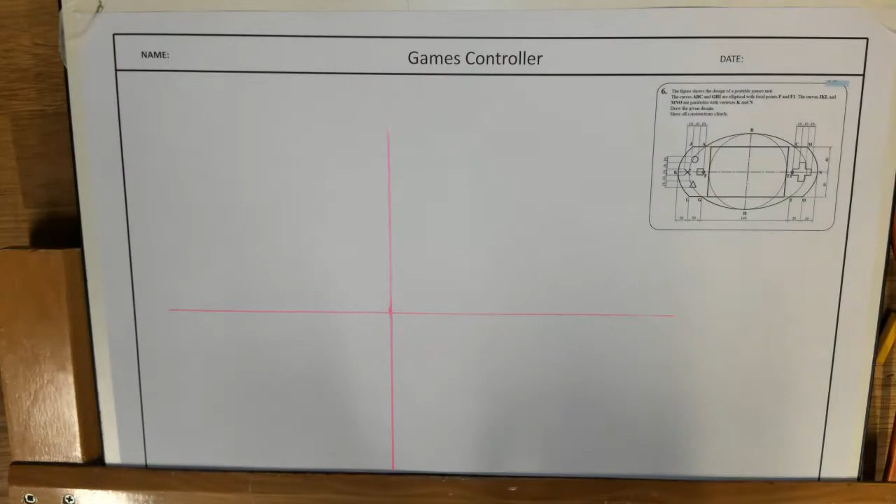So this is a games controller question. It's from a mock. It's a good bit to do with ellipses and parabolas. And we're just going to give you a few measurements to go along with it just to make it a little bit simpler to get started, and particularly when we're starting off here today.

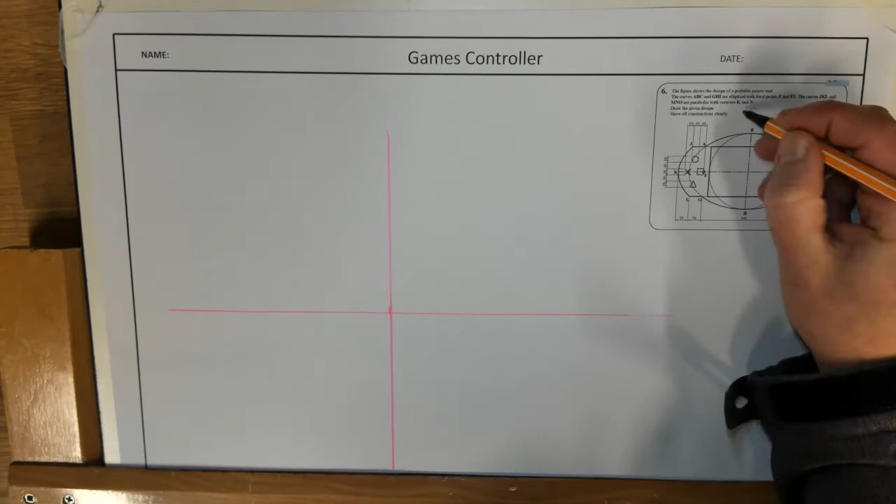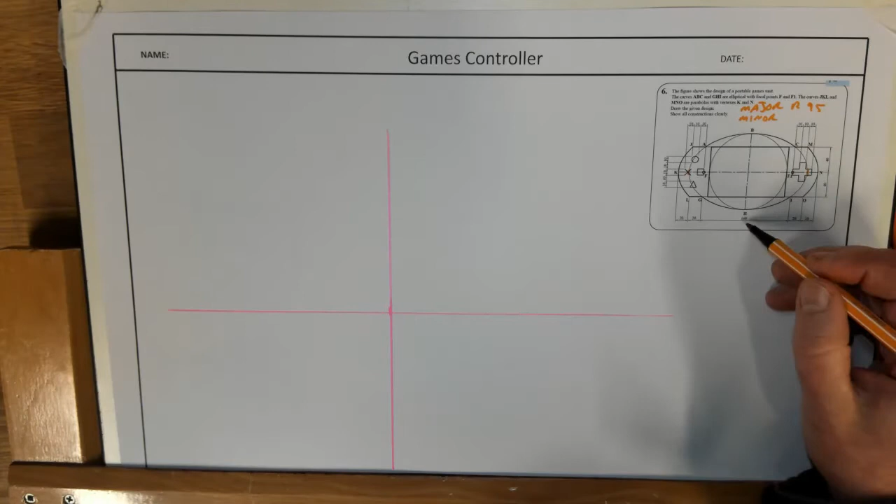So the first thing that we want to give here is the major axis and the minor axis. So we're going to say that this distance here is radius 95. Let me just say 140. Yes, radius 95. Okay, so we put major and we write R95. And then our minor axis we're going to say is slightly less than the 140. So we'll say radius 60. Okay, so there may be a different way of constructing these, but for today, that's going to be perfectly acceptable.

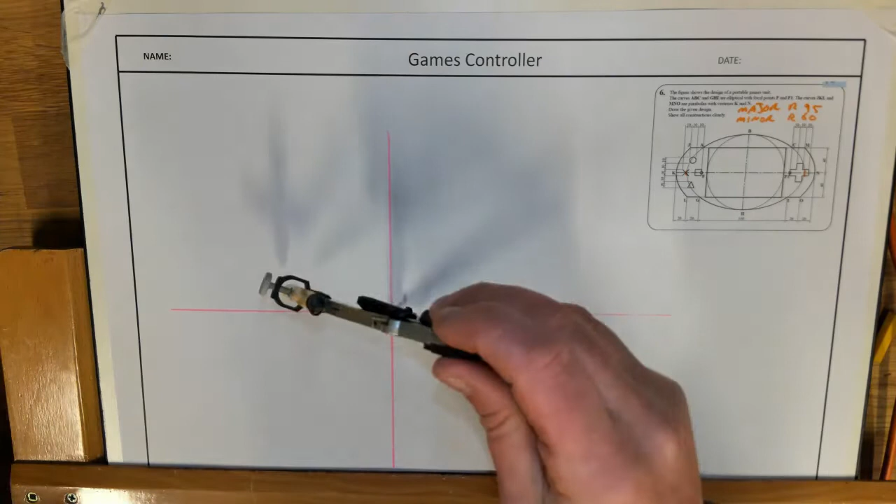Okay, so we're going to set our compass here to 60 first. Okay, so what I did was I came down 130 there roughly, and I came in 140, but I think there will be plenty of space, but just in case anyone was wondering where I started. So there's my minor axis, my radius 60. So I'm going to draw my ellipse first. Okay, so my second one that I need to do is radius 95. Okay, so I'm going to draw that.

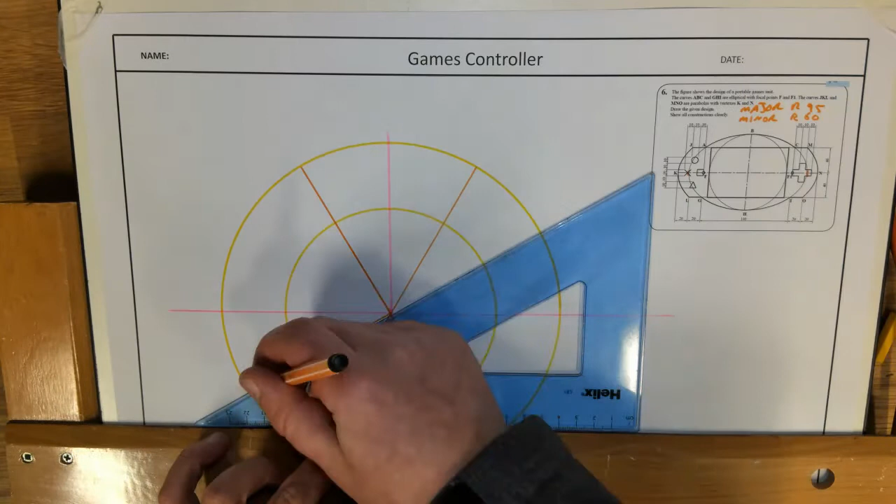And then at this stage, because this is the first full ellipse we've done this year, what we're going to do is draw our pizza slices, as we call them, our 60 and 30 degree lines. And we'll find their various points. Okay. So we'll keep twisting around our set square. And that'll give us our orange lines. So there's basically our main splits done. So you'll see we've 12 splits there.

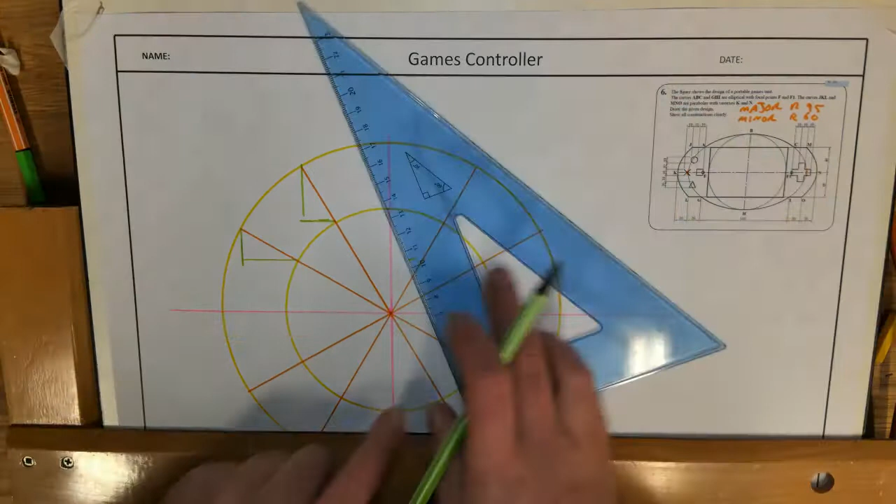And from where the orange line hits the top circle or the bigger circle, we're going to bring it down. We're going to do a construction like that. And I suppose these are different to the ones we did before, in that the ellipse is on its edge, as if you had an egg left lying on a table. So I suppose the first thing that I should have done, although maybe not in black because it's not going to be heavy the whole way. Let me see if I have a light blue handy.

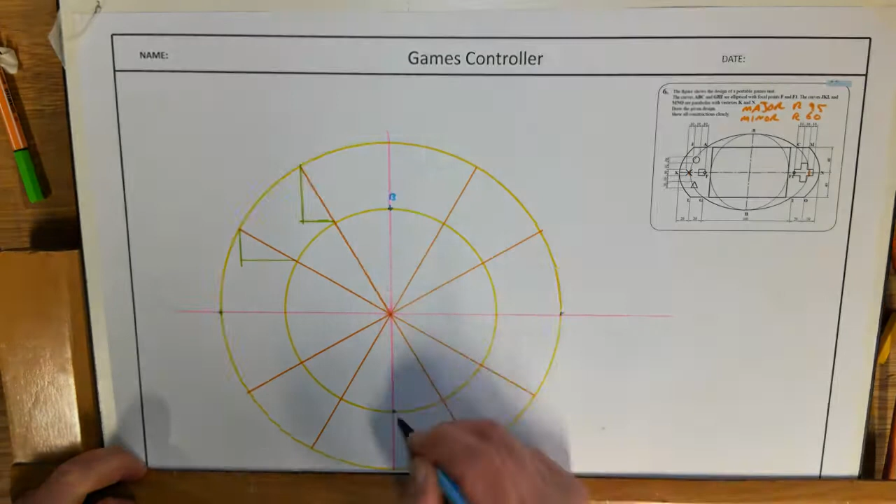So I'll just mark where I want to finish. So they're basically the points that I know. What did they call them? That was G. And that was H. I don't know if they give these two ones. But once I know where I'm finishing, then I know which side of this to use. If I did the other side, say for example here, I should know that that couldn't be correct. So what I can do now is lightly sketch those in. So I'm not going to heavy them yet. I'm using a lighter blue because some of it won't be seen.

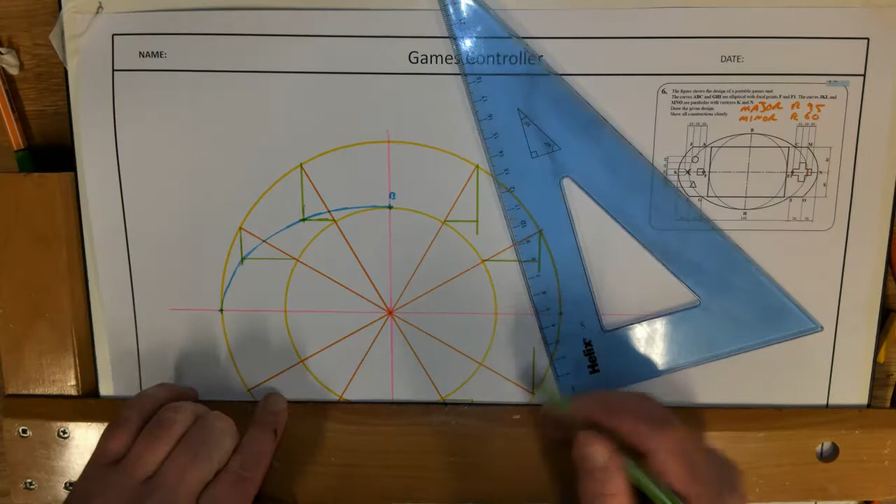Okay, so we'll repeat this for all sides. Now you could also mirror these across and down using axial symmetry, but really this is as quick a method. So that's what I would do. So just on the bottom ones, just to be careful, instead of going down from where the orange lines hit the big circle, they're now coming up. Okay. So we have our 12 points. So again, just be careful with where H is and where these points are, that you don't get confused. Okay, so we'll sketch it.

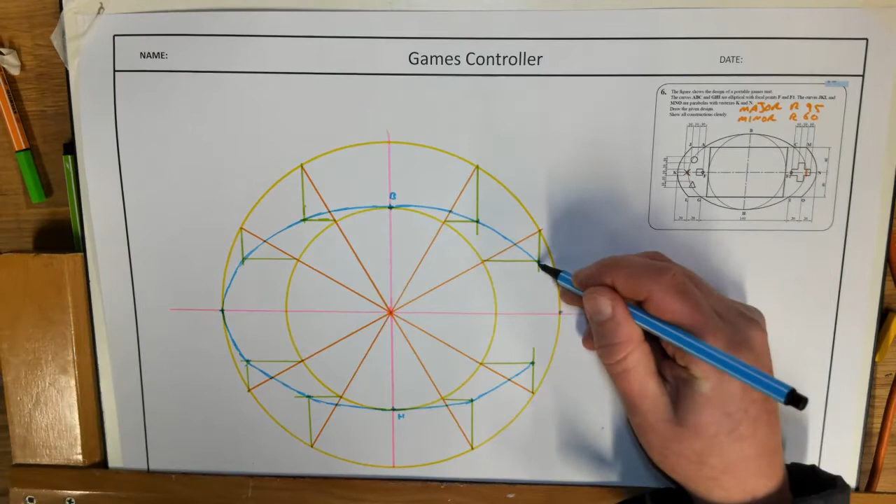So if this is the question that you're attempting in the exam, it's usually question 6. And the most important thing is that you know how to do an ellipse and know how to do a parabola. So I'm not going to look at the screen yet. I'm not going to look at the buttons or the D-pad, as they call this, or basically the crosshairs. If we read the question, we see that these shapes are parabolas. And we know that they're 40 mil above and 40 mil below. And we know that they start out half of 140, which is 70, plus 20. So they start out 90 millimeters.

So let's see, have I another different color I could use? I could use a purple, but it might be a bit dark. Maybe a red. Okay, so we're going to come out 90. We'll just bring it slightly inside of this curve. And we know that we come down 40.

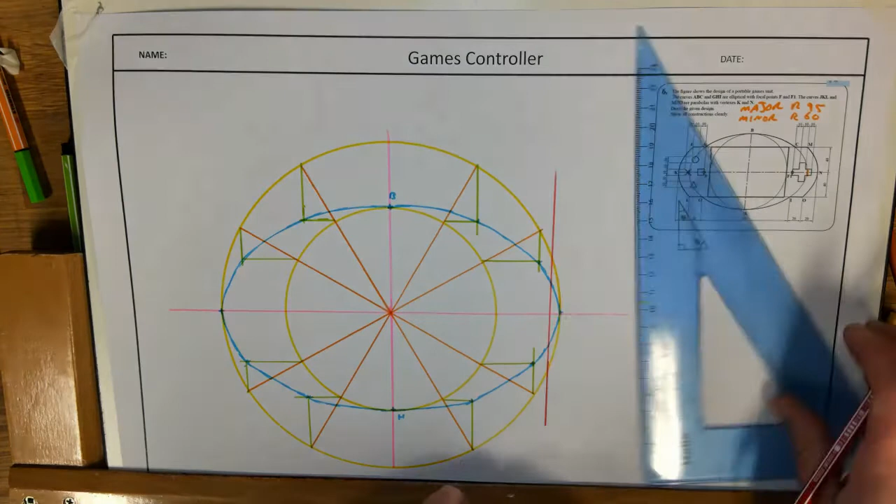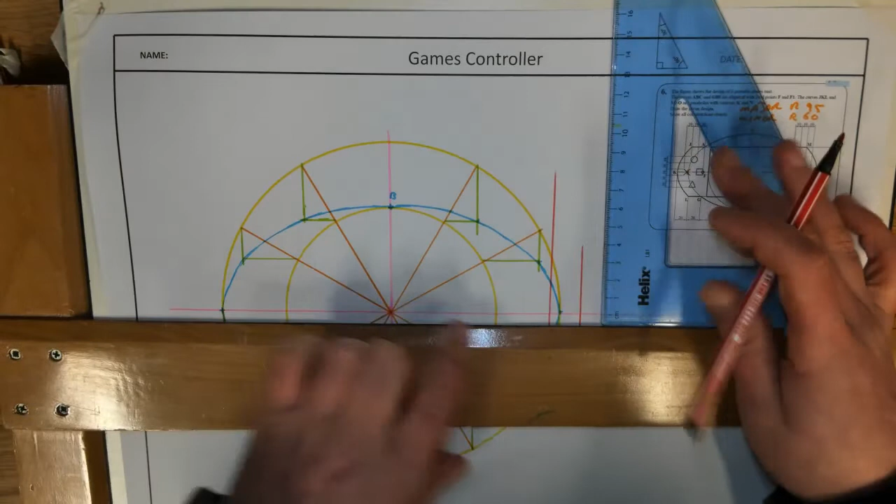Okay. You can draw this, and it comes out 20. It's actually quite short. Quite shallow, perhaps. Double checking that I've done that right. Okay. So basically it's this rectangle. I probably could have drawn it a little bit neater for the video. My set square, some of the measurements are a little bit worn off it.

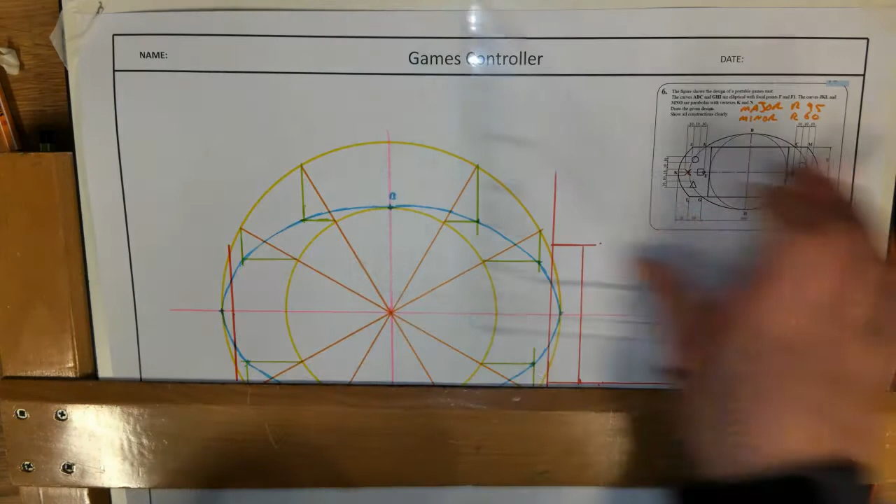So what I'll do is I'll redo it again here, a little bit more accurate, so that you can just see the rectangle rather than the other lines confusing you. So we'll measure 20. And it's 40 and 40, it's 80. Okay, so there's basically the rectangle for the parabola this time. So again, what you'll do is you'll mark the vertex, which is K in this case. This is the turning point.

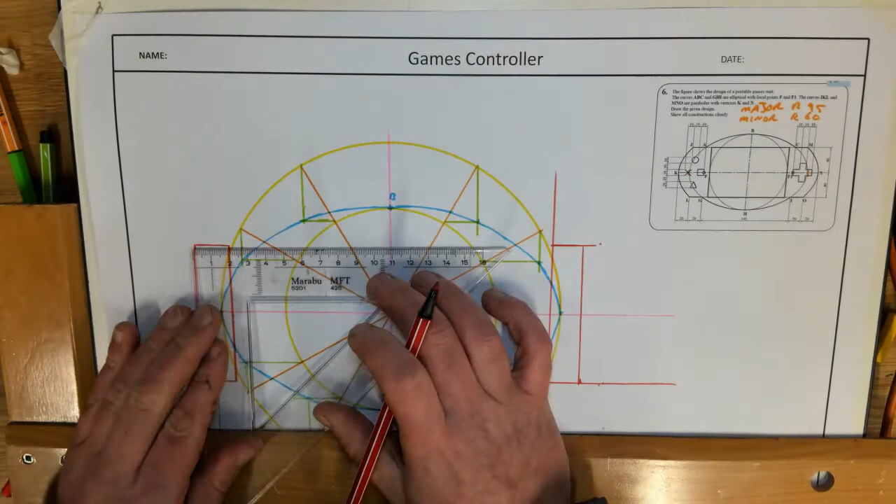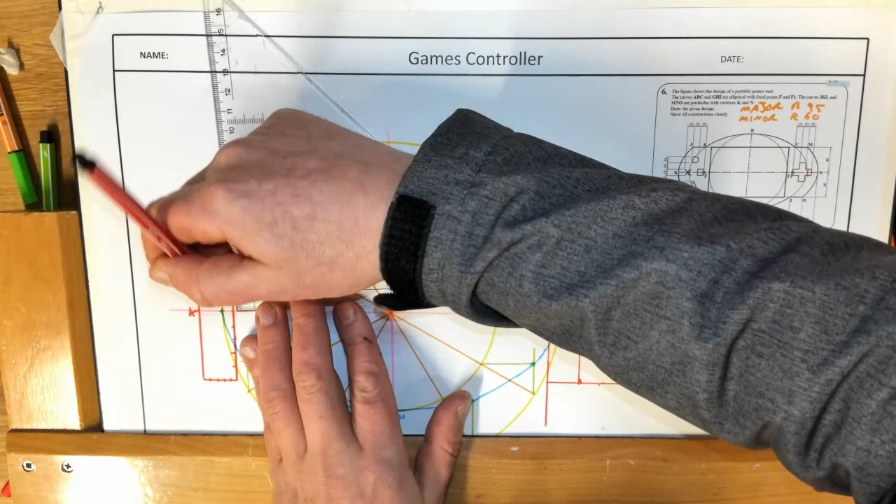And you'll split this. So 20 divided by 5. So hopefully my marker isn't too thick. 4, 8, 12, and 16. And the same here, 4, 8, 12, and 16. And this here is 40 divided by 5. So it's 8, 16, 24, 32. 8, 16, 24, and 32.

Now I might use a slightly thinner pen to mark these, just because the marker on this will cause problems. So I'll try to zoom this in a little bit. Not too far. Okay, so hopefully that will make it a little bit easier for the video. And I'll use my thinner pen. Okay, so hopefully that seems to be okay. Anyways, at this stage you should know the gist of how to do a parabola. Hopefully that shows up okay on the video.

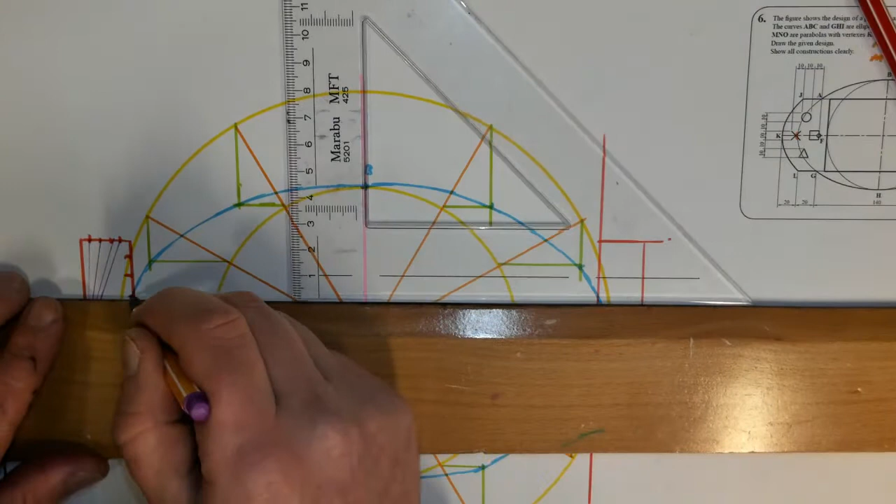And these ones will come straight across. So as usual, I should have numbered them. So 1, 2, 3, and 4. I'm a little bit inaccurate just because I'm using a pen. But basically there's 1, 2 and 2 across, 3 and 3 across, and 4 and 4 across. And we'll sketch that in heavy because that's going to be heavy at this stage. So I'll use a purple.

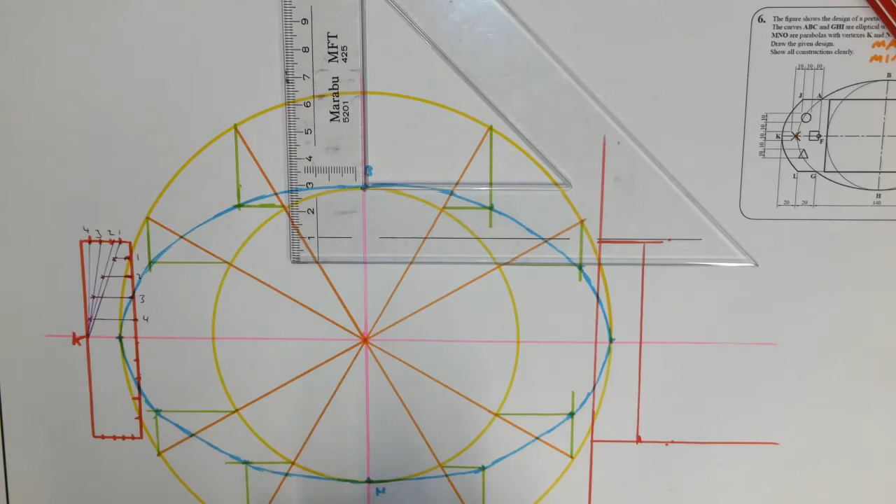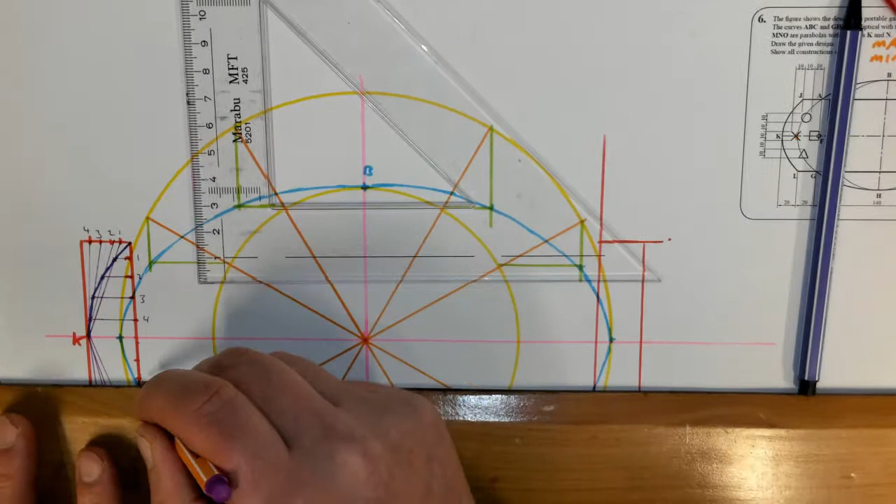Okay, so then what we do is we just repeat it. Now again, we could mirror it if we wanted to, but this is as quick, especially on something that's so small. So that's a little bit more even than the other side was. Bring it across and we'll put a dot on our various points. 1, 2, 3, and 4. And we'll sketch in our curve. Okay, and then it shows us that that comes across to meet the ellipse. So there's a small little gap there.

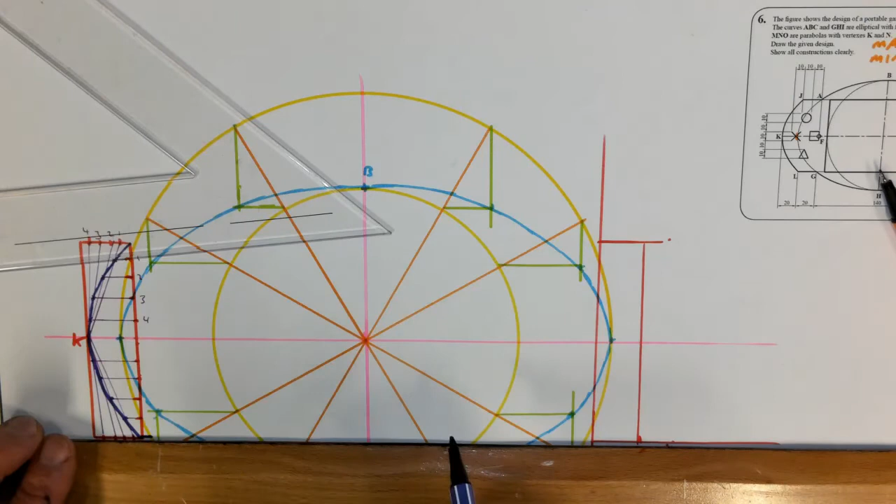Okay. I hope I came out the right size there. I think I did. Yeah. Oh, sorry. I was wondering. I was only bringing it as far as the circle. That's why I was getting confused. It needs to come as far as the blue ellipse. Okay. So we'll repeat the same thing on the other side.

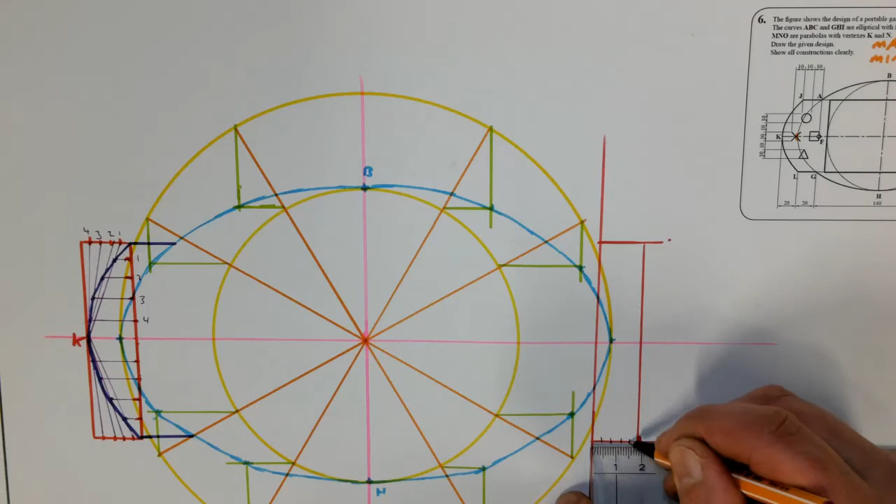So this should be 20. So we have 5, 10, 15, and 20. I'm going a little bit inaccurate there. I don't know what I did. Okay, but the method is fine. Again, the thickness of the markers and depending on which side of a set square can make quite a big difference when you have such thick markers.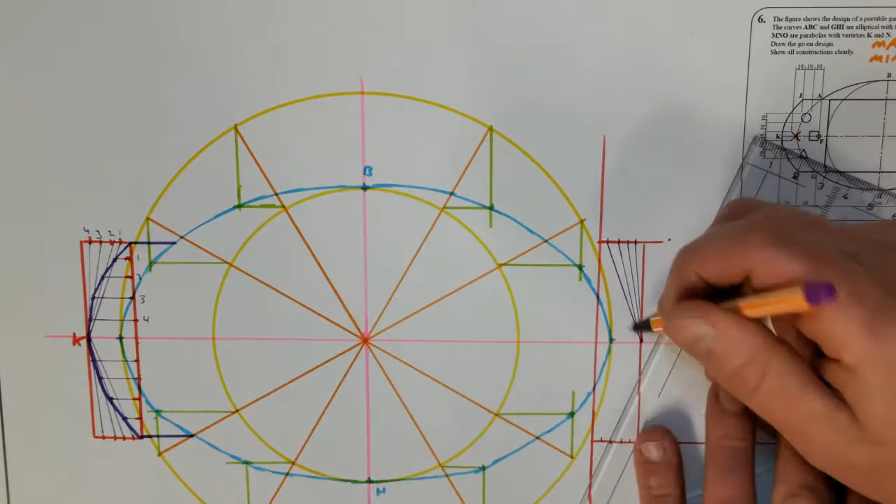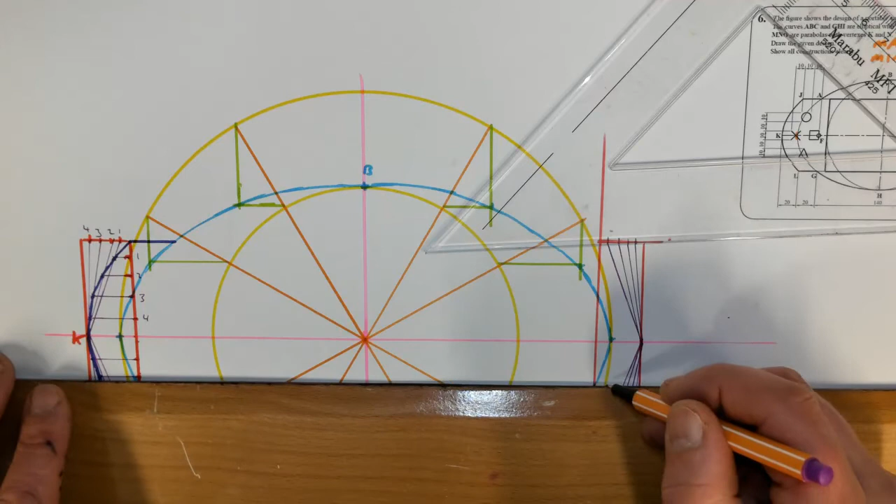And we bring this across to meet it. So you can bring these lines straight across without necessarily measuring the splits again, because they have to be the same on this side. But whatever's handy, whatever makes life easy for you. Okay, if it's handy for you not to get confused and to use the ones you had originally. The most important thing is that you do your best not to make a mistake.

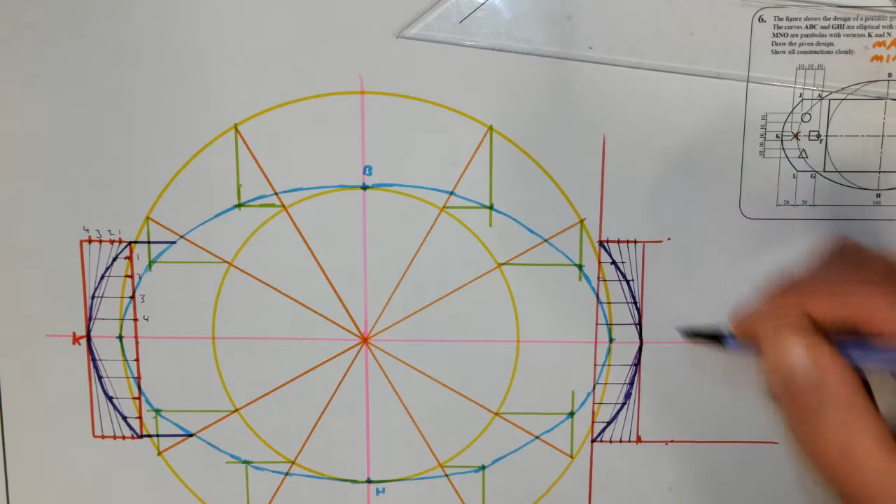Okay, so then we take the purple pen. There's this point, this point, this point, this point, this point, this point, this point, and this point. So again, carefully mark out your points. Number them if it makes things easier for you. This will go across to meet this. This will go across to meet this. And now I'll just take my purple and go over the outline that I would see that would be heavy.

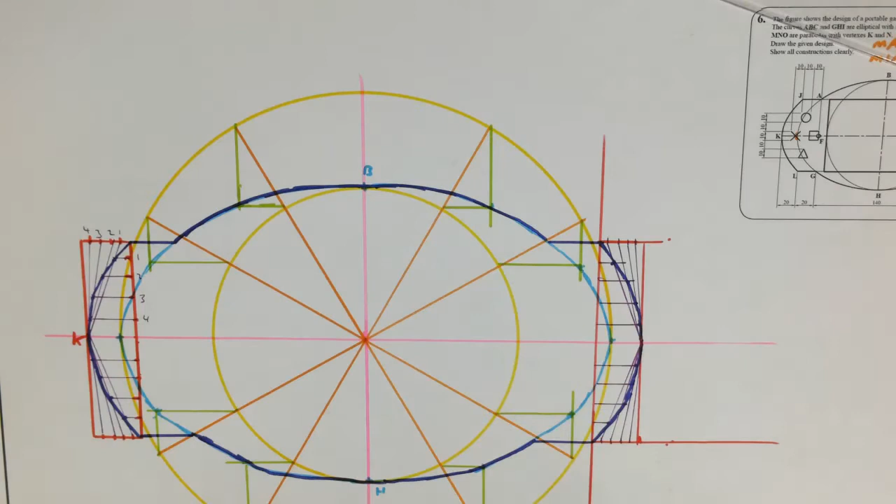Okay, so I have the games controller there, and they're the most important bits, that I get the ellipse shown and I get shown that I can do a parabola. So drawing in the screen now is probably the next easiest thing. So we know that it's going to be 140 wide, so we know that it's 70 from either side of the line. So if I draw a line across between the two of these and measure 70 on the left and 70 on the right. Oh no, sorry, it's not 70. I was wondering because it would be touching the edge.

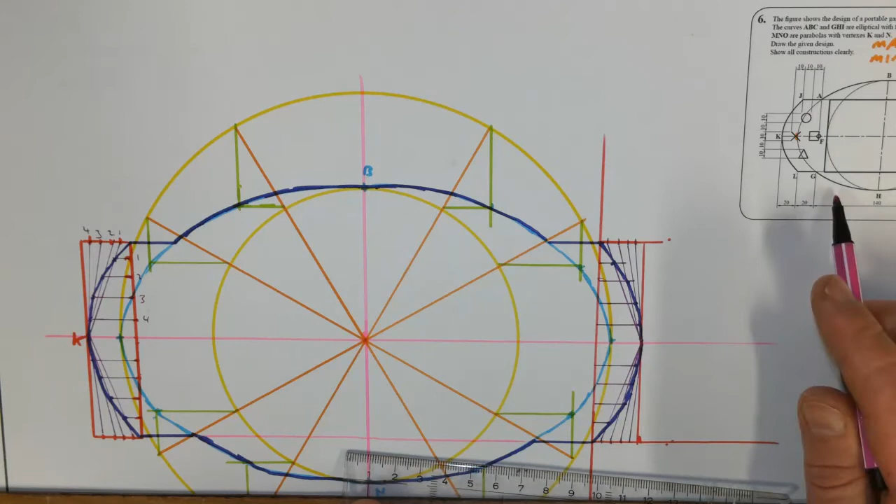It's the same width as this smaller circle. Sorry, I was trying to see what it is. So I was wondering because 70 wouldn't, there's no gap between it. So bring this across to meet it. Okay, so what that actually is, it's level with the circle. Okay, so again we'll heavy that in our purple.

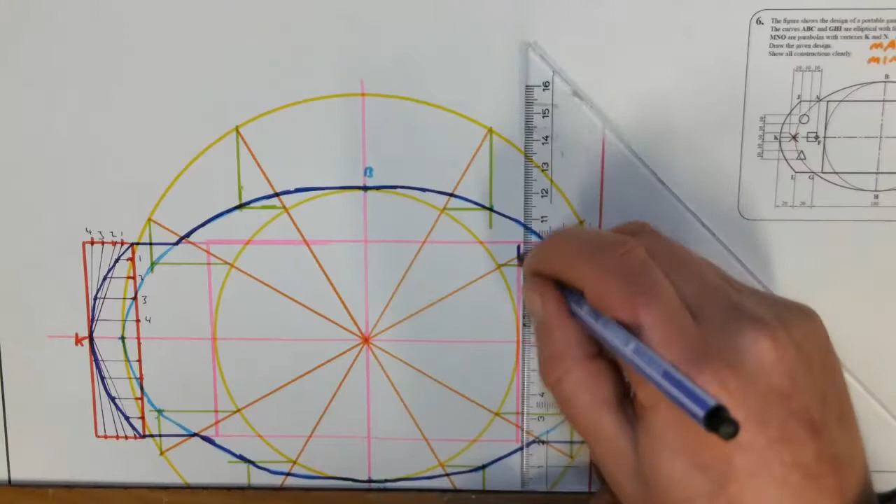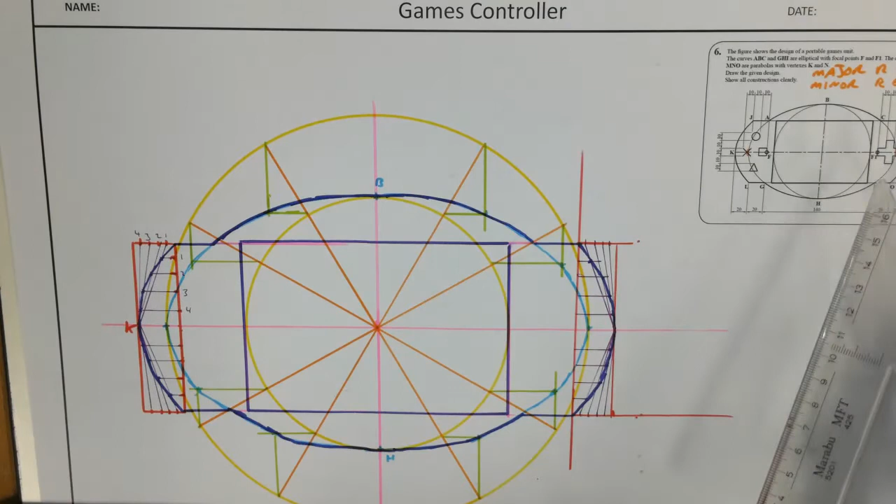Okay, and again if you're not sure, like it took me a second to see that, and you get stuck on the day of the exam, the most important thing there is that you put in a screen. Okay, we'll zoom that out a small bit. Okay, so what you can start to do then is you can start to put in the circles and the crosshairs here. So we'll start at that. So we know this is basically 10, 10 and 10 wide, and we can assume it's a symmetrical shape.

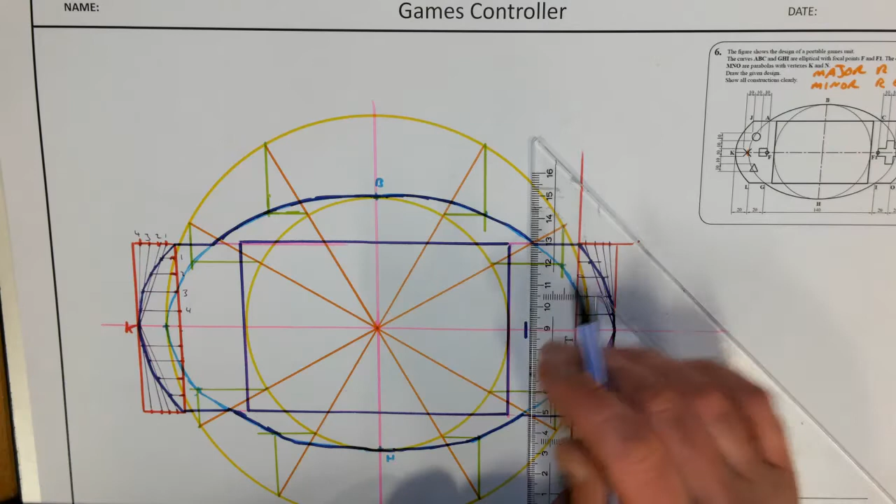So have they given us a distance for F? It seems that it lines up with this point here where this meets. Okay, so if we're accurate, that's going to be my starting point. Okay, so I'll bring this up 5 and I'll bring it down 5. And then I'll start to draw it out. So basically it's going to go 10 across.

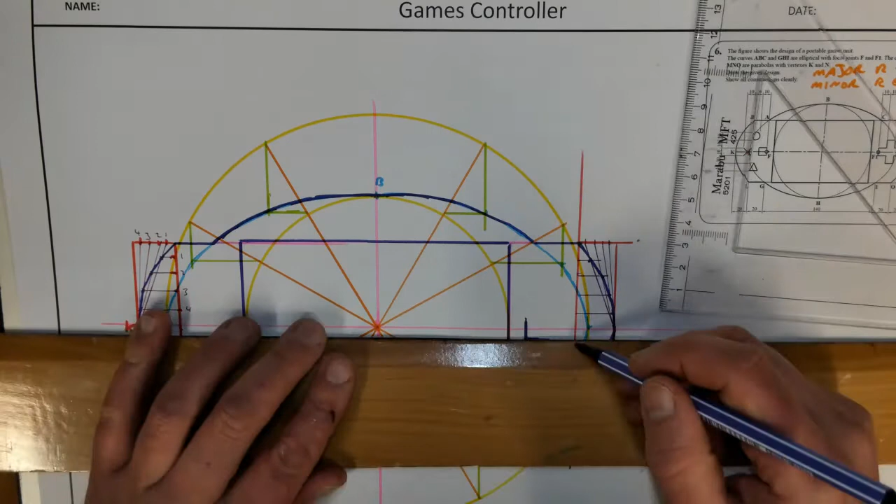And I should be drawing this lightly really. 10 down, 10 across, 10 back up, 10 across further, and then up, and then the same on the top side. Okay, so it could be a little bit neater, but that's the main thing.

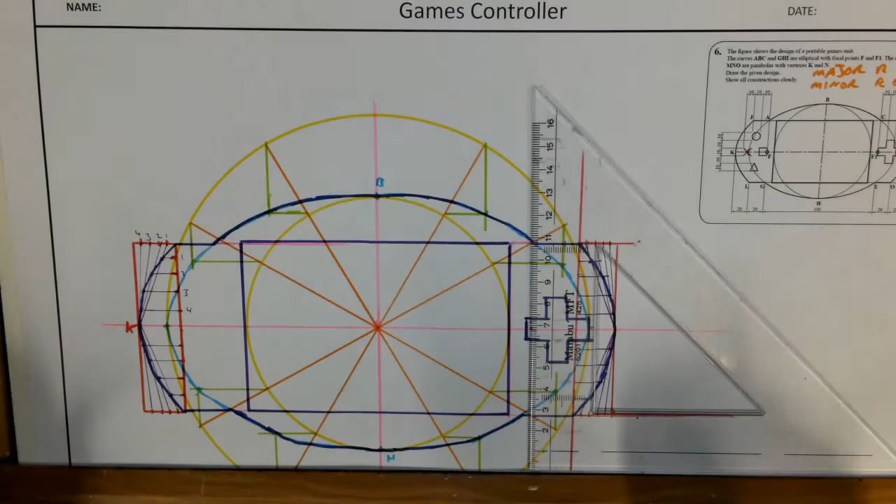So what that lined up with was that. Let's see if I draw a little tick mark here. That lined up with that, or I lined it up with that. Okay. And then the same on the other side. We'll assume that the square button that they start with is here. So again, it's 5 mil below and 5 mil above, because we know the height of it is 10 in total. Okay, but again, if that causes a little bit of confusion, I wouldn't be too hard on yourself.

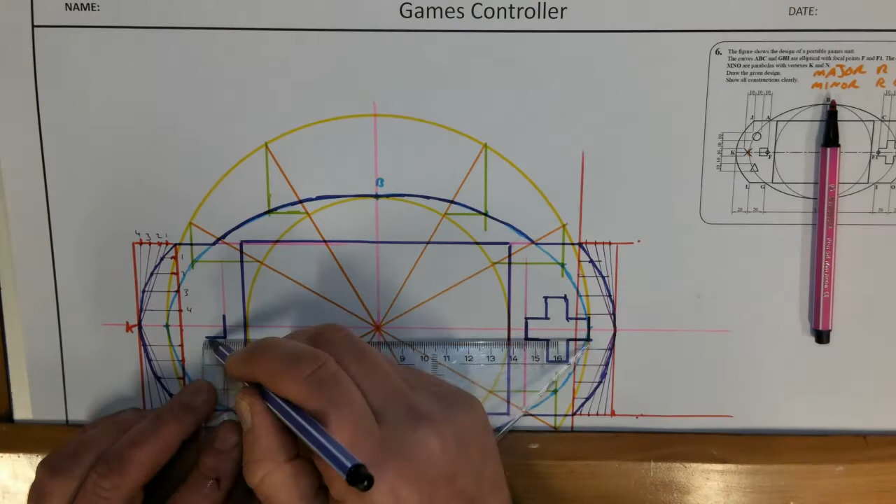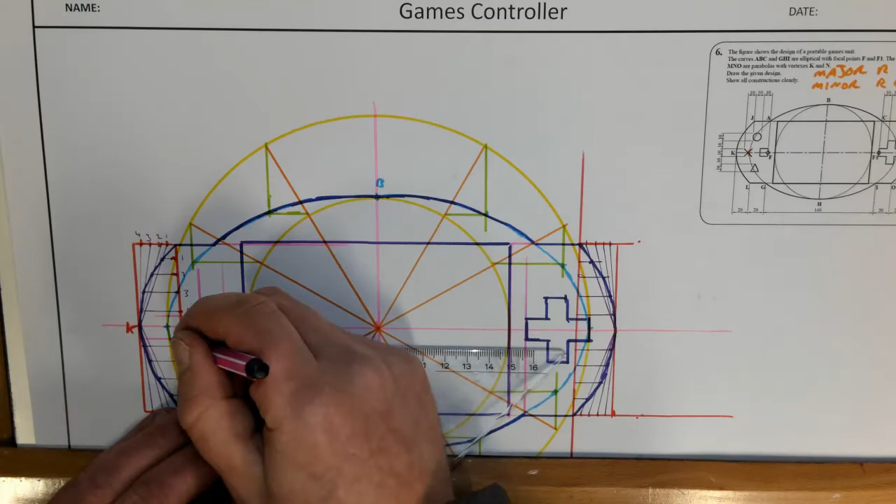Okay. And what we'll do now is we have to come down, or well, we can extend that out, I suppose. And we can extend this down. And we'll measure another 10, which happens to be on that red line. And another 10. Now again, yours may look slightly different to mine. It just depends on the thickness of my markers. I may be a little bit off in some areas. Basically, I'm keeping a 10 mil gap between each shape for the button.

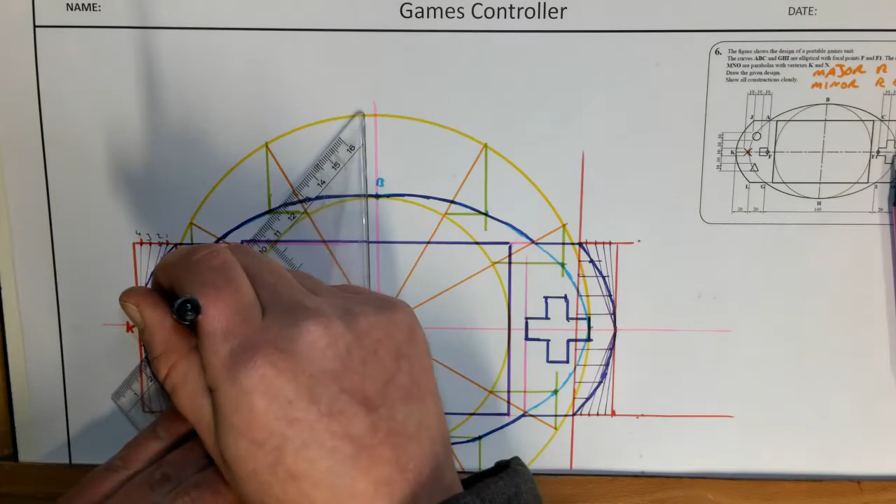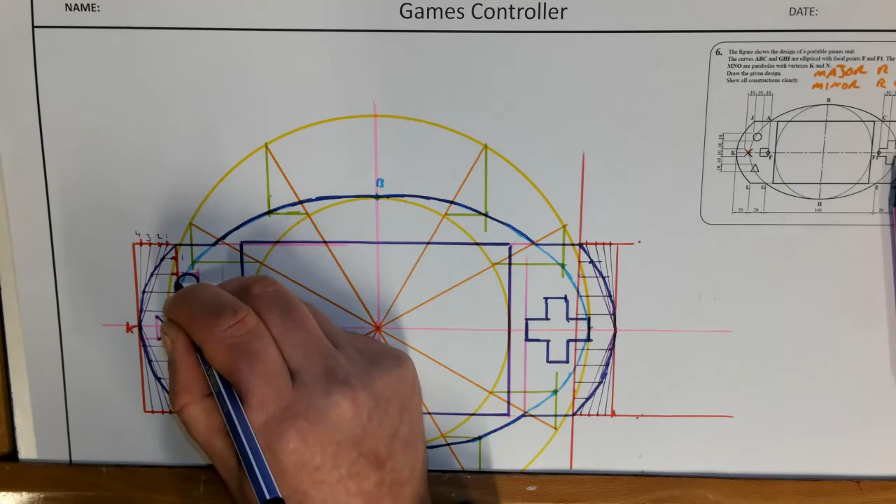So I have a rectangle here, or a square, for drawing my X in. So I'll draw in both corners. I have my square done. This triangle here, if it's 10, there must be 5 to the middle. So I'll draw this triangle. And then the last thing is to do the circle. Now, unless you have a circle template, you're going to really struggle to get that circle in. So all I'm going to do is just sketch it. Okay, it's better to sketch on the day of the exam than not put something in.

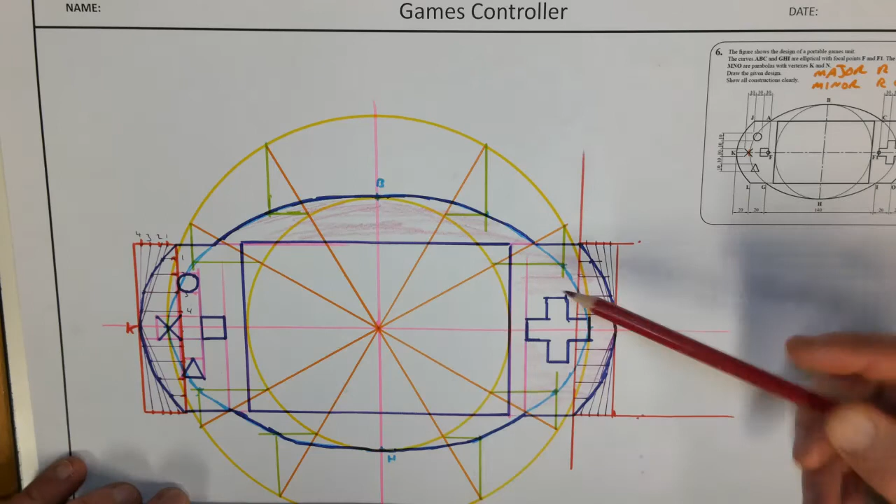Okay, but that's the question done, completed. I have the screen, I have the crosshairs, I have the various buttons put in. Even if we just got the screen on the outside curves, that will be sufficient. And what I'm going to do is maybe take a colour and just shade it in there. Okay, so I definitely don't want to go too heavy, because I spent a lot of time doing the constructions, and I want the examiner to see how you did it. Okay, I'm just going to shade it sort of a reddy colour,

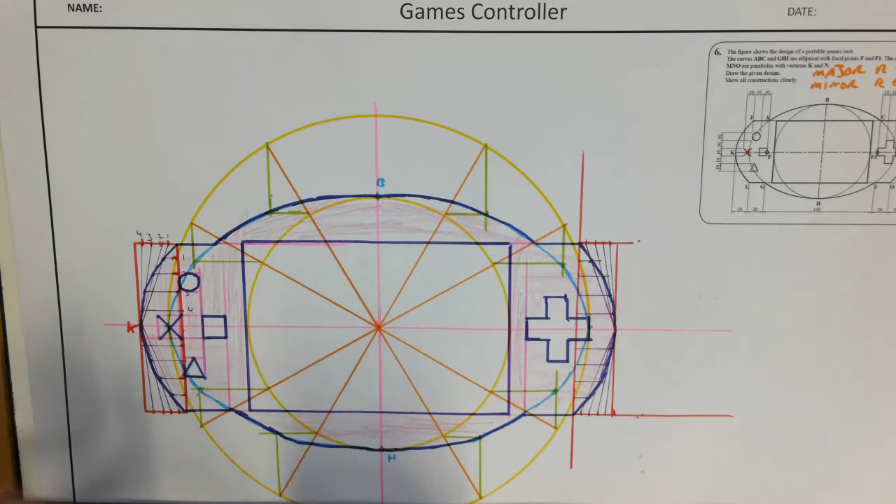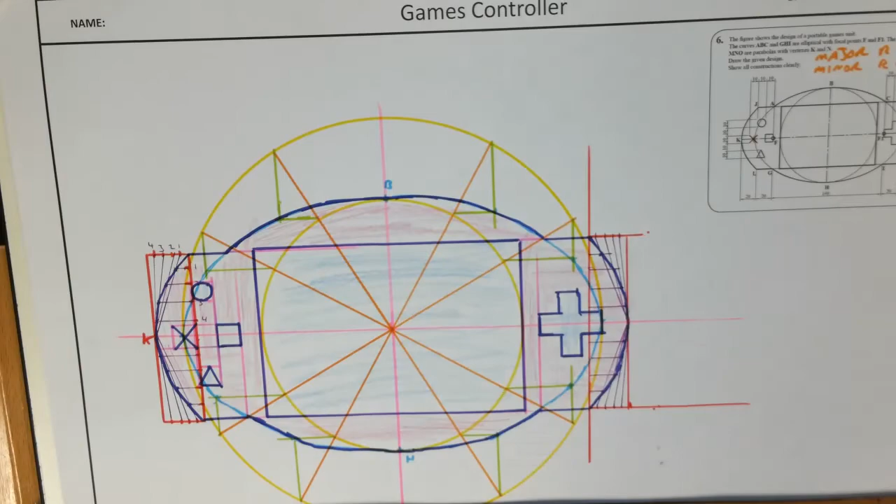so a little bit of, and stand it out a little bit, and then maybe a blue for the screen. Okay, so something that you shouldn't be spending too long on, 2 or 3 minutes. And there's my question, and I'll try to zoom it in a little bit better so that you can see the whole thing in one go. That's pretty good. Okay, and that's the work for today.